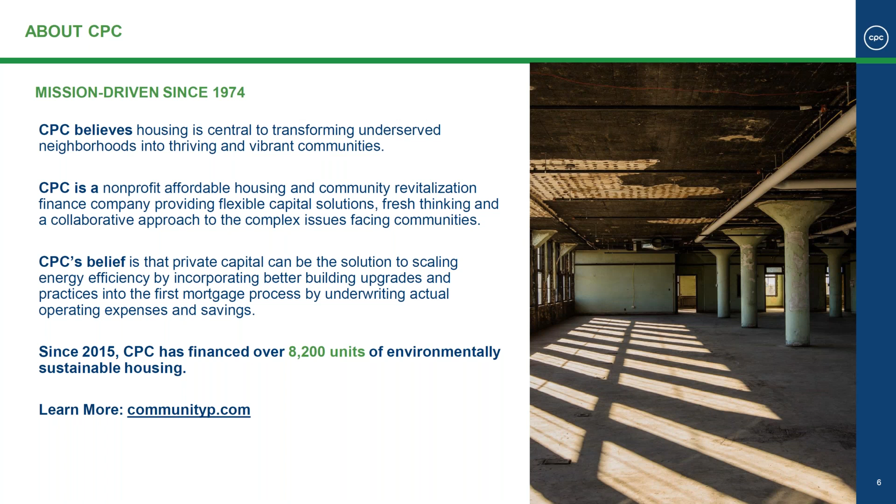Before we jump into the presentation, I very briefly want to introduce CPC. CPC is a nonprofit tax-exempt 501c3 affordable housing and community revitalization finance company. CPC was formed in 1974 as a direct response to the issues of property abandonment and blight that New York City was facing at the time. Our mission was and continues to be to bring low-cost capital and fresh thinking to the complex issues facing communities. CPC provides a full suite of products to finance multifamily housing and to create and preserve affordable housing.

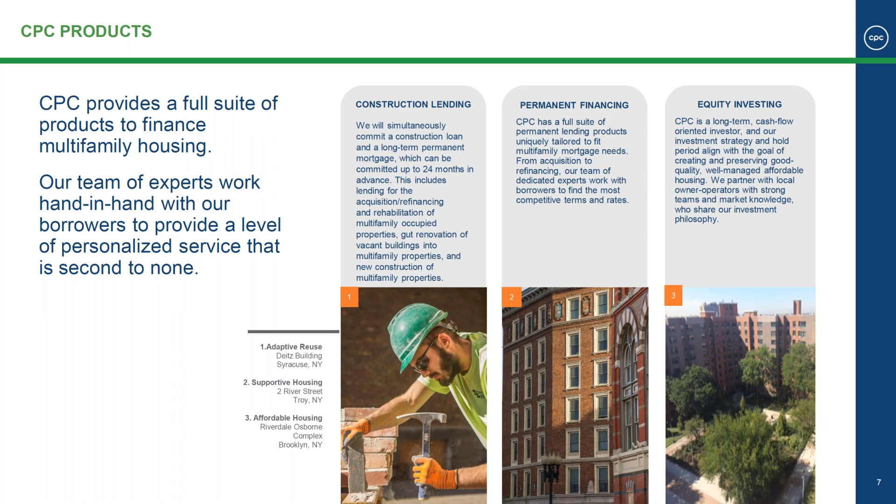Today, we are one of the largest community development financial institutions in the country solely dedicated to investing in multifamily housing. To date, we've invested over $11 billion of private and public capital in the Northeast region, which translates to approximately 195,000 units of quality housing in neighborhoods across New York State and beyond.

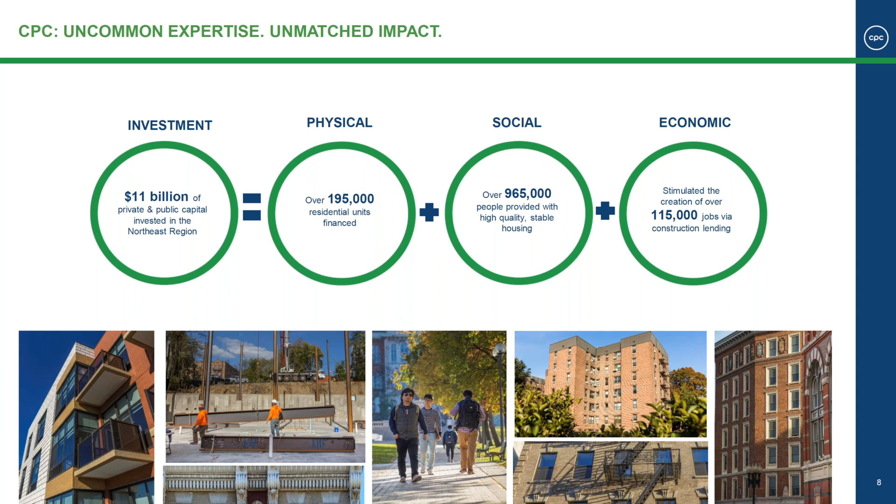Just very briefly about CPC's sustainability platform. The sustainability platform was created in 2003 to carry out CPC's energy efficiency and decarbonization goals. CPC is a carbon neutral company. We measure our carbon emissions on an annual basis.

We have a formalized reduction strategy internally, and then we offset remaining emissions on an annual basis. We've developed a number of tools and resources to educate and inform and engage the multifamily industry, including the CPC VeriFi tool, which is a software application that calculates potential utility savings and helps owners explore the financing options and cost savings for different multifamily building upgrades.

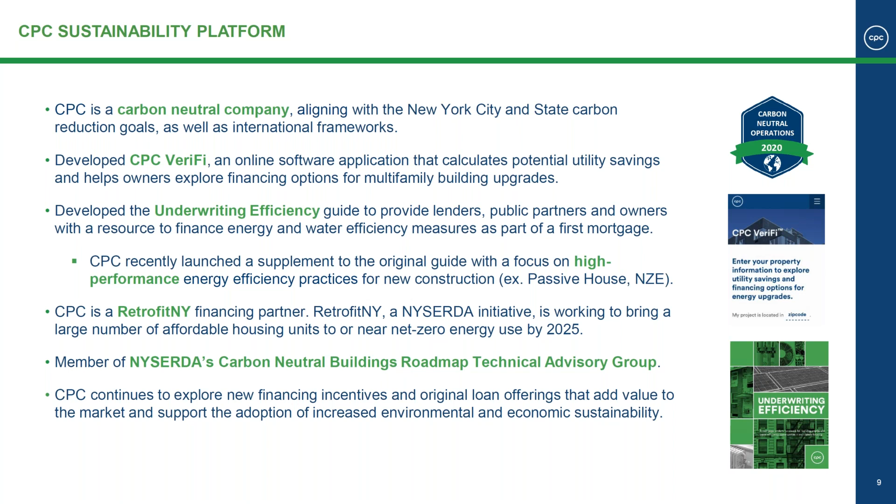We've developed the underwriting efficiency guide, which hopefully many of you know and have used. It was a guide to provide lenders and public partners and owners with a resource to finance energy and water efficiency measures as part of a first mortgage. We recently launched a new guide, which there's a slide on next, so I'll hold off for that. And we also partner with public and private organizations, mission-oriented organizations, and we continue to explore new financing incentives to promote and encourage energy efficiency and decarbonization.

Just lastly, very quickly, I'll make a quick plug. This is a new guide that CPC created. We recently launched this just last month on high performance new construction. The guide is designed for multiple stakeholders within the multifamily ecosystem. It tackles the basics of high performance design and how those design decisions can affect life cycle performance, value, risk, and overall asset health. So we really look at, what is a high performance building?

We explore some of the factors that are increasing demand for high performance buildings, such as climate legislation and new requirements from capital sources. And then we kind of do a deep dive into the building life cycle, looking at how high performance guides decision making and cost decisions, and how it affects operations and maintenance, and appraisal and resale throughout that building life cycle. And finally, we look at some of the non-energy benefits that high performance creates.

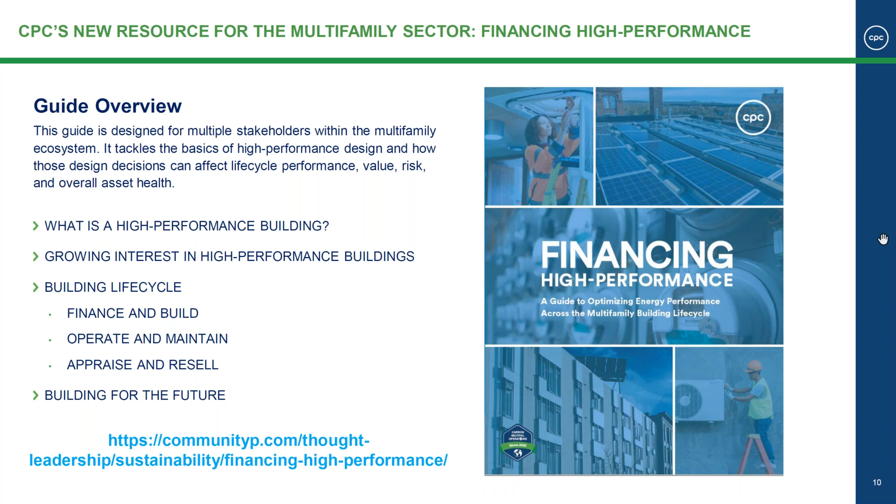He will walk us through this presentation. Okay, thanks. So I want to talk about the Advanced Energy Design Guide for multifamily buildings in this session. Let's see if the slide will advance. Click on into the window, Paul. Yep. Oh. Did you see it advance on your end? No. I'll go ahead and take over. Try it again. It works. How about that? Okay, all right, let's do that.

So first, I want to talk about the Advanced Energy Design Guides, but before I start, they are really based on a concept of a zero energy building. And we're using this definition as a basis of that. It's really about the balance between the consumption of the building and getting the consumption down to the point where renewable energy can supply the remaining needs.

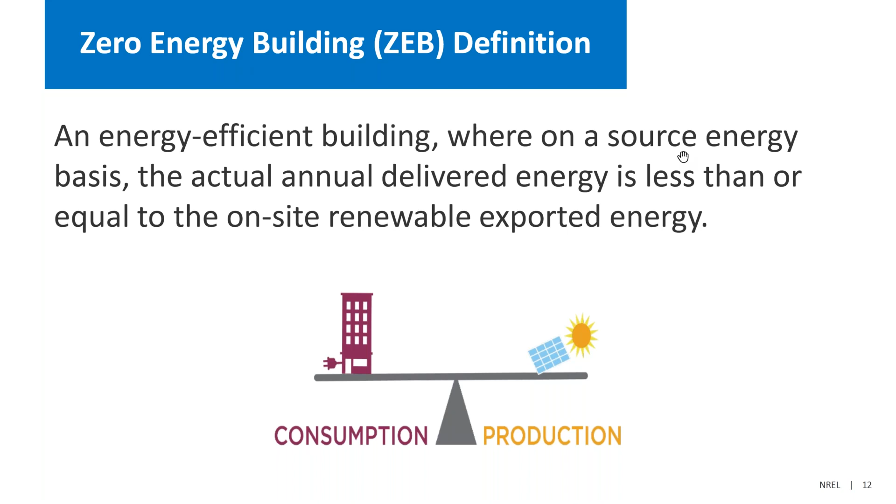A lot of it has to do with where we draw that boundary. These buildings are connected to the grid, so I want to make sure everybody gets that - it is a transaction between the grid supplying energy as well as producing energy on site. If there's an excess, it can be exported, and not only to the grid, but it could be exported to other uses such as electric vehicles.

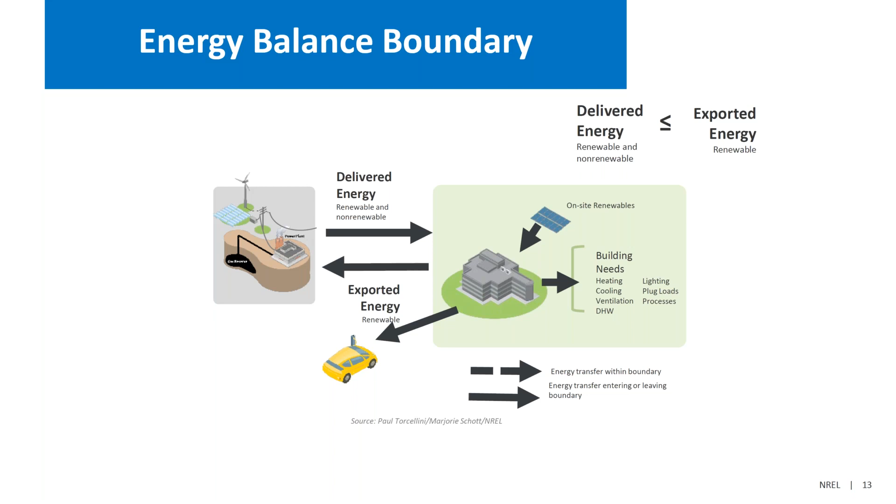When we start thinking about this, we really think about how much energy is available at the site. For most people, that renewable energy is coming directly from solar and then through photovoltaics. While there are other renewable resources available, a lot of what we are focused on is the photovoltaics from the production side.

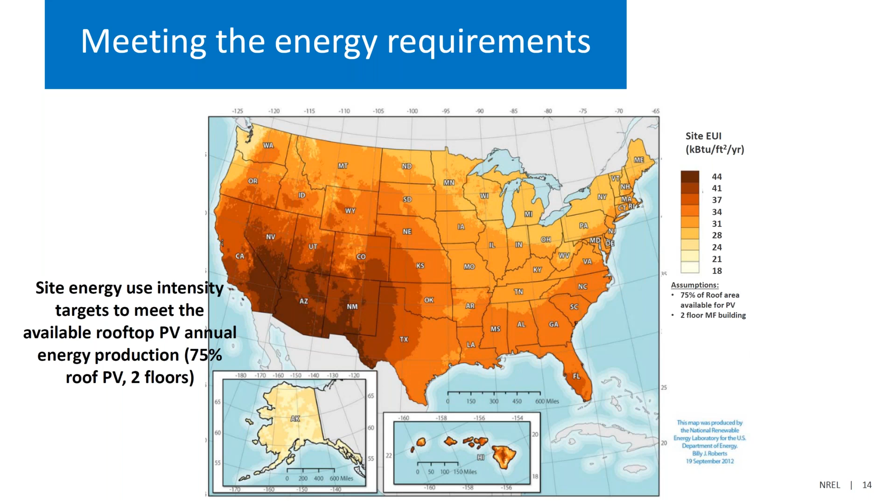Southern Arizona could use 44,000 BTUs per square foot as an EUI target, whereas moving up into New England, it could be half that amount. What we strive to do is get that EUI to match what the consumption is of the different buildings.

Moving into the Advanced Energy Design Guides, which implement that thinking, these guides have been around for many years. They're published by ASHRAE, but put together as a cooperative effort between ASHRAE, AIA, U.S. Green Building Council, and the Illuminating Engineering Society. Funding comes from the Department of Energy, and the national labs have provided technical support and a lot of the modeling to show the feasibility and impact of different energy efficiency solutions.

They started off first as 30% guides, very specific to a number of different uses. Think of them as a cookbook or instruction book on how to achieve this kind of goal. About 10 years ago, a little more than that, we moved to 50% guidance and produced guides in the areas listed there. More recently, we've switched to zero energy guides, and already published are K-12 schools, as well as small to medium offices.

In this presentation, I want to focus a little bit on the multifamily guide, which is expected late this year, probably early next year at this point.

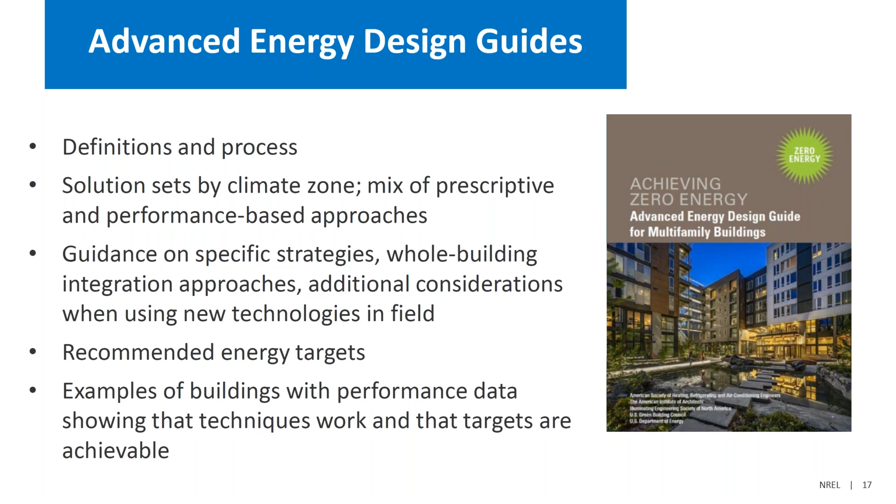And then we have examples of buildings, and these examples are critically important, to show that they have performance data and that these buildings really work. But also real buildings are built with real dollars, and to show people that the business case can be put together in a way that makes sense and works for investors, tenants, or owners, whoever is actually in charge of that business case piece of it.

Primarily, the audience is the architects and engineering community, those making the design decisions. We find another use case in building owners, where they can gain confidence and look at their risk in trying to deliver a building like this, say these EUIs are achievable, others are doing it, and use it as a mechanism to hand off to design teams to get this level of performance.

Very quickly, the guide is broken down into an introduction, rationale for why these things are important, the keys to success, how do you put teams together, how do you make decisions.

There is a chapter on building simulation and modeling, creating a building such that you know how it's going to perform before it actually has to really perform.

And then the bulk of the book is our how-to strategies. There are roughly 200 how-to strategies in each of these guides, broken down by different disciplines.

As an example of some of those different disciplines: building and site planning, envelope, daylighting, electric lighting. We do hit plug load management, which is really important for multifamily, something design teams don't normally think about, but how do you strategize to reduce plug loads when you might not have total control over that because you don't know what tenants are going to bring in, but there are strategies to work with that.

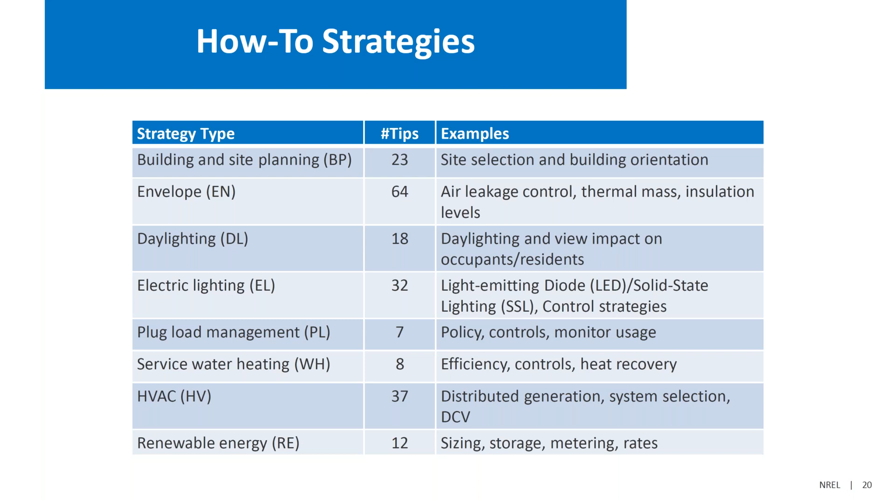We did provide modeling support for these and modeled actual floor plates of buildings that would mimic multifamily, and it's been made into a bit of a generic model.

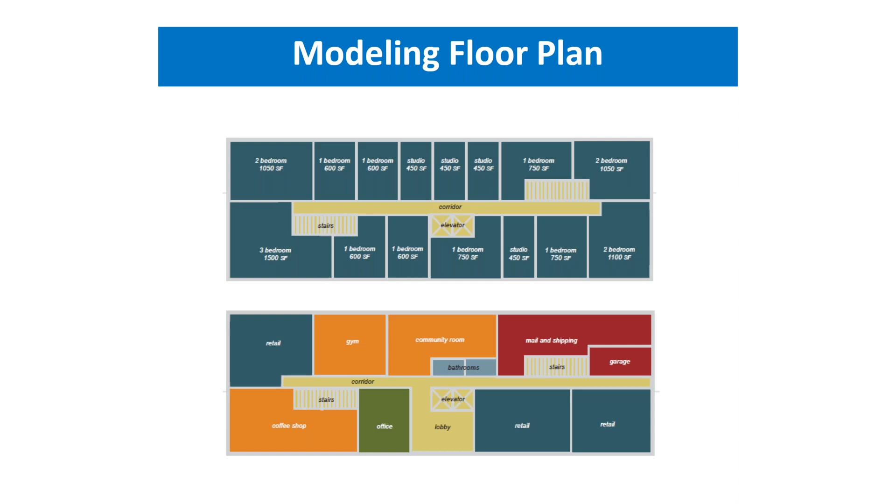The first floor in these buildings is commercial space, and it could be a light plug load retail operation—this one had a little coffee shop in it. It could be community space and office space, representing what goes on in the first floor of a lot of these buildings, with tenant spaces, residential tenants, above.

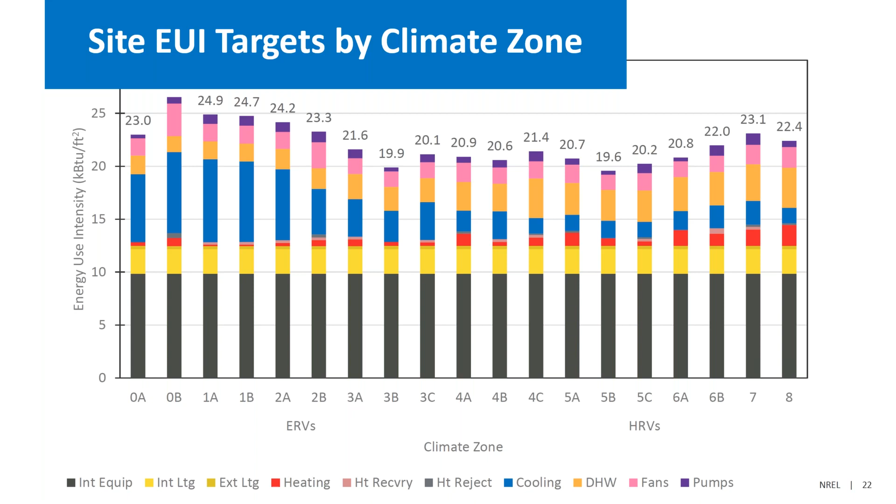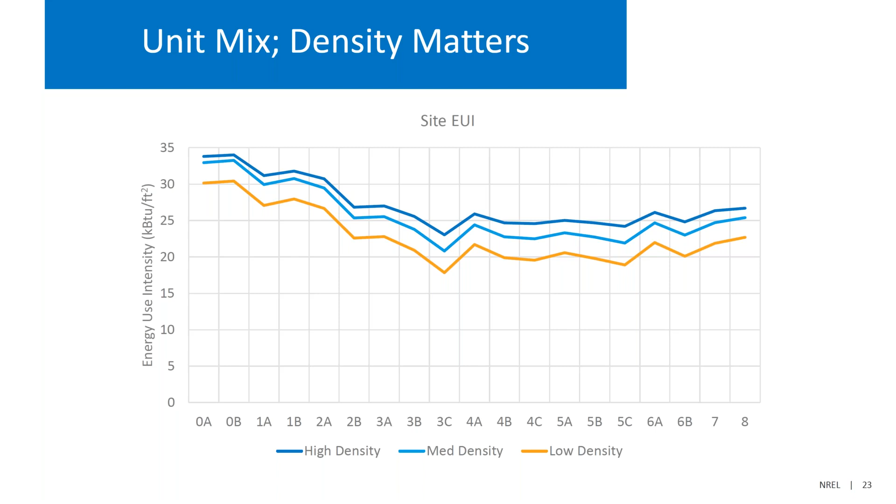The density is interesting—it matters in terms of how many 1-bedroom, 2-bedroom, and 3-bedroom apartments you have, because in a 1-bedroom scenario you're going to end up with a lot more refrigeration. So we did look at how those different densities change in the buildings across different climate zones.

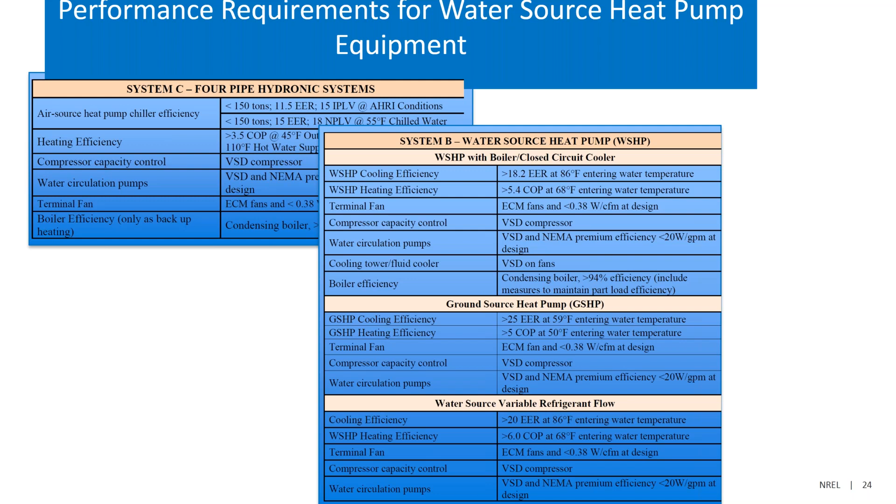So there's really three aspects of this all rolled together.

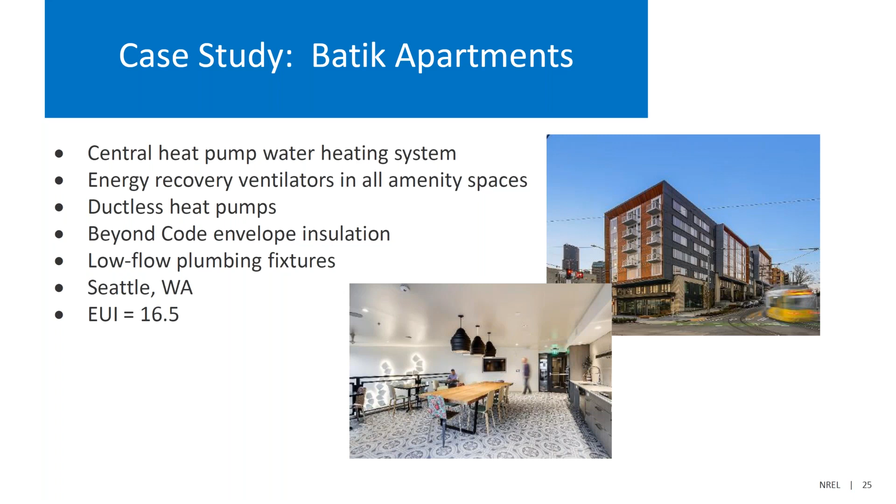They are free and available through that website, from ASHRAE. We are expecting this to be out early next year. I also want to mention that AIA, USGBC, and ASHRAE now have online training on the Advanced Energy Design Guides.

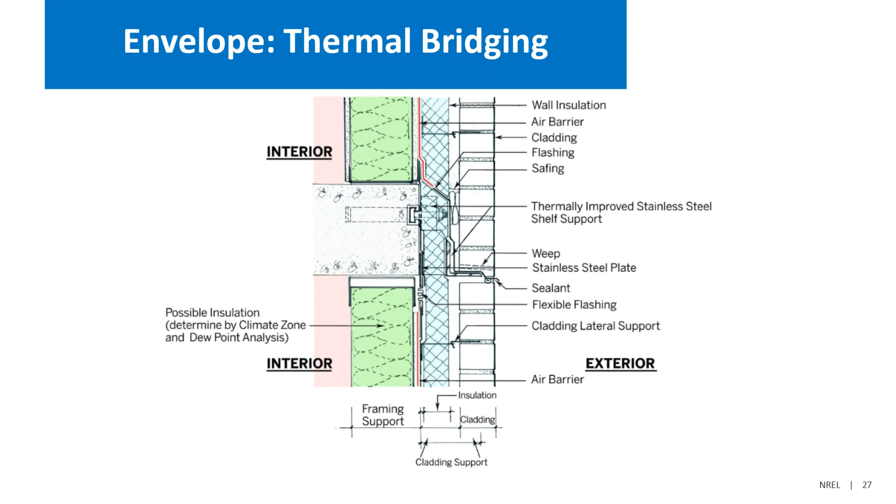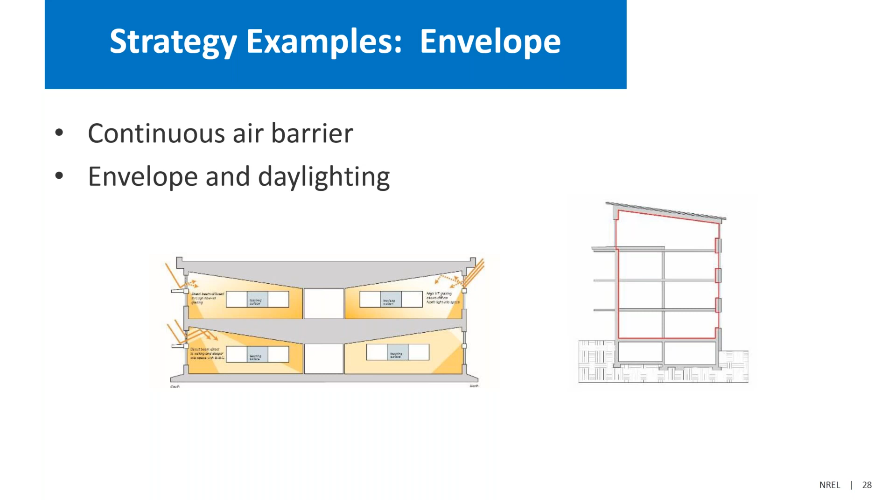And again, same on the envelope, looking at continuous air barrier, starting to talk about pressure testing buildings to make sure that the envelope is of very high quality.

I will wrap up there. I would encourage you, if you have questions, to enter them as Connie had talked about at the beginning, and we'll address those later.

Terrific, thank you Paul, it sounds like a wonderful guide. I'm eager to get my hands on it. You mentioned it will be published in early January - is that correct? That is currently the plan. We're always working with the schedules - this year, as many know, have been challenged on many fronts. We are going to get it out as soon as we can. It is done and drafted and in the publishing process now.

Fantastic, well it sounds like you really got something in there for everybody - practitioners, designers, architects, engineers. But also, from where I sit as a lender, the examples with performance data showing that these techniques really work is so key. As a lender, we're interested in comps, and the more comps we can point to, the more aggressive we can be in our underwriting. So that's terrific. Next, we will hear from Maya Gantley, project manager at the Association for Energy Affordability, and she'll take us through a case study from California. Maya, the mic is yours.

Hi everyone, my name is Maya Gantley, and I'm with the Association for Energy Affordability, AEA, a nonprofit that implements and provides technical assistance to an array of multifamily affordable housing energy efficiency programs in New York and California. Today I'll be talking about a California case study that went through one of these energy efficiency programs and completed a deep retrofit, approaching net zero.

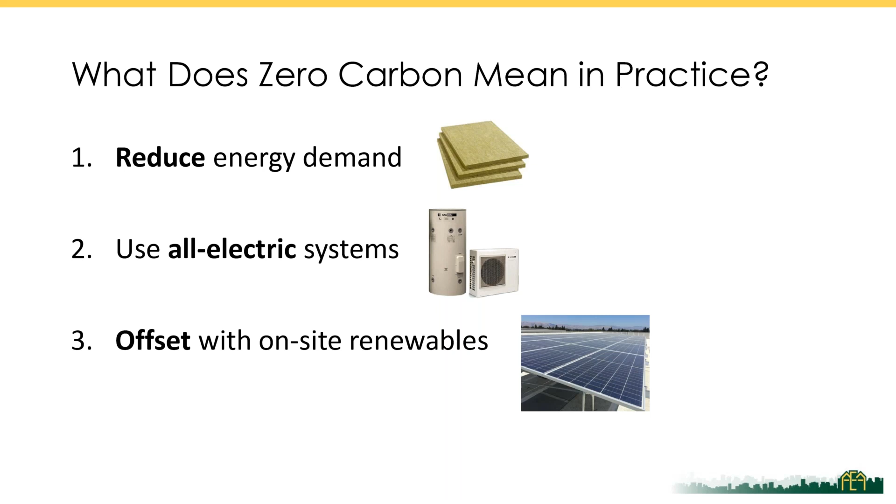For every project, we try to utilize three principles. The first is reducing your overall energy demand, focusing on air sealing and insulation and really improving the overall building envelope. Secondly, we look at using all electric systems - really talking about heat pump based systems, so heat pump water heaters and heat pump HVAC rather than electric resistance, lower efficiency electric systems. Third, we offset with on-site renewables, ideally talking about PV systems.

The three main design challenges we face on nearly every project are electrical capacity, cost, and knowledge and comfort. For electrical capacity, this really can be a challenge, and it sometimes does stop a project from moving forward with electrification. But often it is possible, and it's key to investigate your load assumptions and even complete load monitoring to dial in your HVAC sizing. Especially for retrofits, offsetting even one or two key systems is still a great achievement, even if you can't do all of them. For cost and knowledge, these really go hand in hand, especially as we engage with owners and contractors, getting them involved and educated about these technologies. We found that upfront costs can come down, and concerns around maintenance are often alleviated.

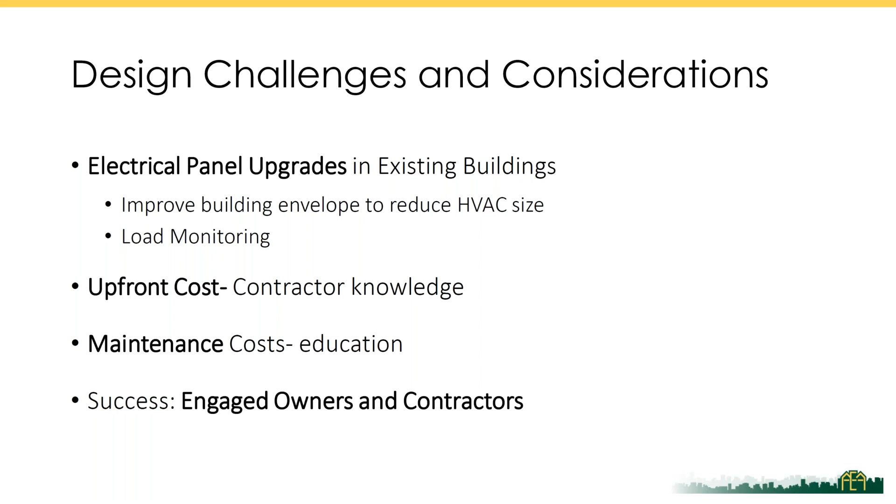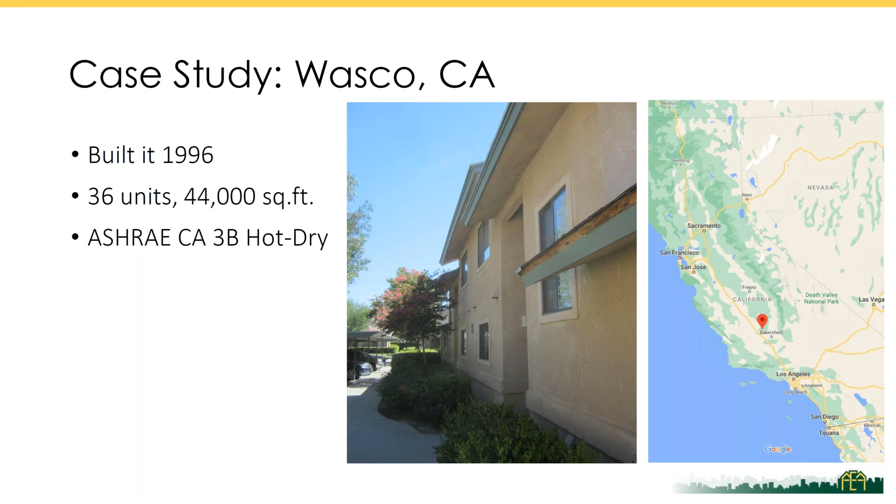So diving into our case study, today we're talking about a project in Wasco, California, located in the Central Valley, built in 1996, 36 units, and 44,000 square feet. This was a 9% TCAC project as well, so there was a larger scope beyond the energy efficiency that we were looking at.

So the first chunk of the scope is some of the low-hanging fruit, including LEDs, low flows, and high efficiency refrigerators. Then we focused on improving the envelope through attic air sealing and insulation, as well as double pane windows, and improving the ductwork. Then we fuel switched from in-unit gas water heaters to in-unit heat pump water heaters, and in-unit gas furnaces and ACs to high-efficiency inverter-driven heat pumps. And lastly, we offset with on-site renewables, a 110 kW solar array, 93% of which was allocated to resident bills.

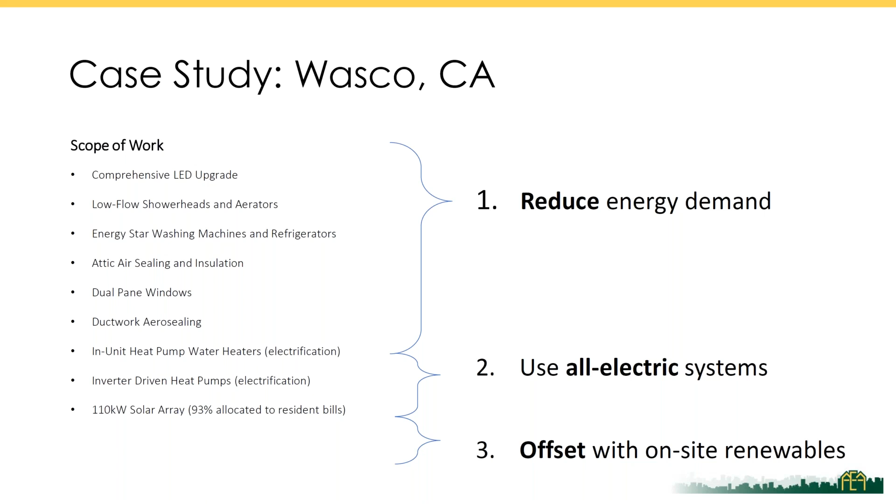And then just really quickly about the project cost. The total cost of the retrofit of this scope was $1 million. The various leverage funds we were able to utilize were around $540,000, so the out-of-pocket cost for the owner was $460,000. This is probably a little higher cost than standard, partly because TCAC costs are often inclusive of other trades. This same owner has done very similar scope projects at much lower install costs, maybe resulting in 100 or 150K out of pocket.

So the first main envelope improvement was the pretty standard attic insulation along with air sealing below. We also have Aeroseal duct sealing. This is maybe a more advanced technology than standard, but essentially you pressurize your ductwork, spray this foam that covers every small hole, and can bring duct leakage from say 25% down to 5%. It's super effective, but it does come at a cost premium. A cheaper alternative could be done with hand sealing, boots to drywall, even cleaning and lining your return plenum. There's a lot you can do for a much cheaper cost that still has a great impact.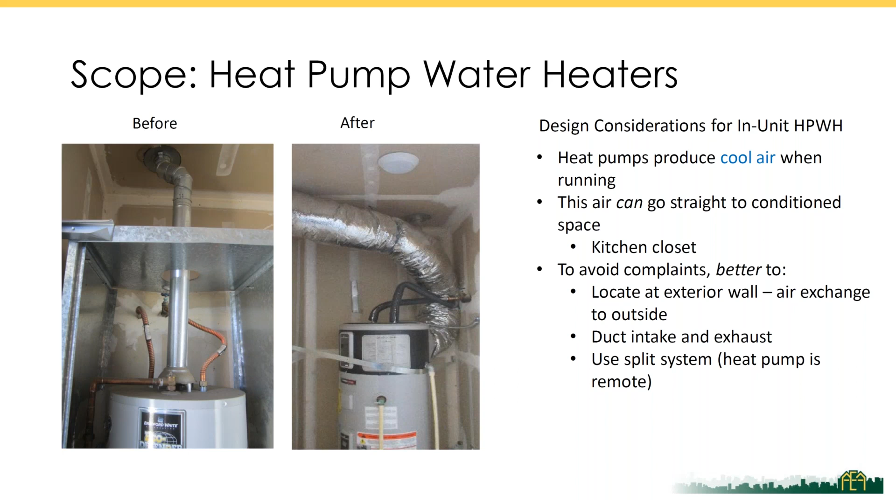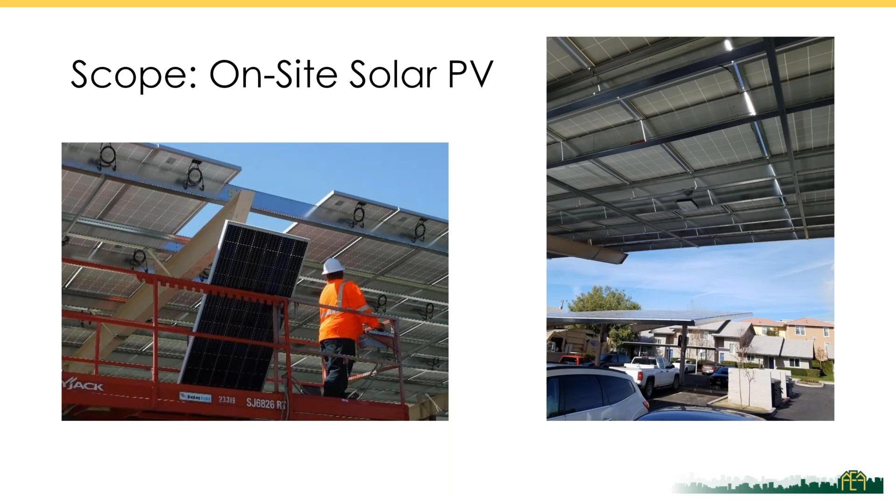And then lastly, we had solar PV on this project, so we were able to utilize virtual net energy metering, which was really key. For folks outside of California, it essentially allows us to use a commercial size system, but allocates a percentage of the production to each unit. Especially for affordable multifamily properties with all in-unit systems, this was really key to making the project a success.

All right, so diving into the data, which I know most folks are really interested about. Right here we're looking at total residential energy use in kBTU monthly pre and post construction. We have natural gas in orange, electricity in blue, and our PV solar in yellow, which is not factored into the electricity post occupancy. You'll notice we still have a small amount of gas remaining, because we were not able to offset the cooking at the property. This was ultimately limited by the electrical capacity, and we weren't able to do any panel upgrades, so that was a limitation.

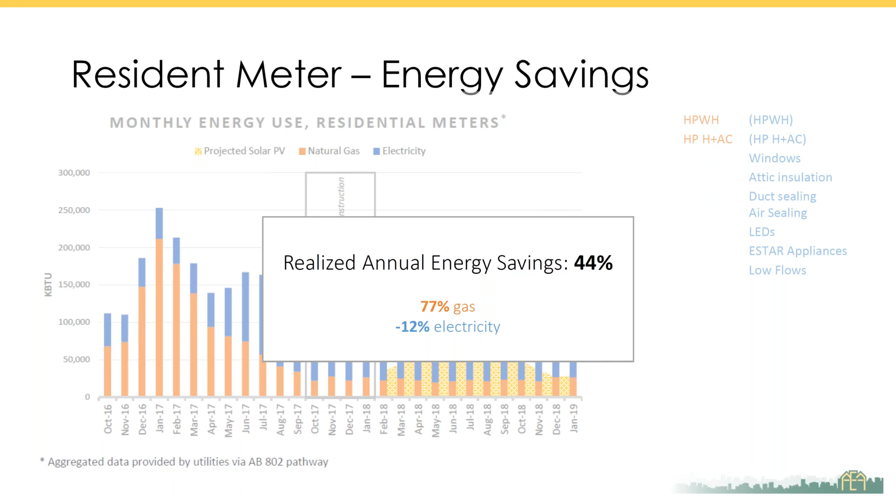Overall, we saw really high energy savings of 44%, and we're not even looking at a passive house retrofit. These are really basic energy efficiency scope measures, but we're seeing really high savings. The realized annual energy savings was 44%, with 77% gas savings, and a slight increase in electricity usage.

So most folks ask, okay, great, you saved a bunch of energy, but what happened to the residential meters and their utility bills? So we're looking at total residential meter energy cost per month before and after, and again, PV is separate from this.

What we saw is ultimately from energy efficiency only, we still saw cost savings of 18%, or just over $8,000 per year. Including solar, we saw 68%, equivalent to $30,400 per year. This translates to about $830 per year per resident, which is really impactful for these low-income communities. This was our projected number, and upon further analysis, we ended up seeing 70% cost savings overall.

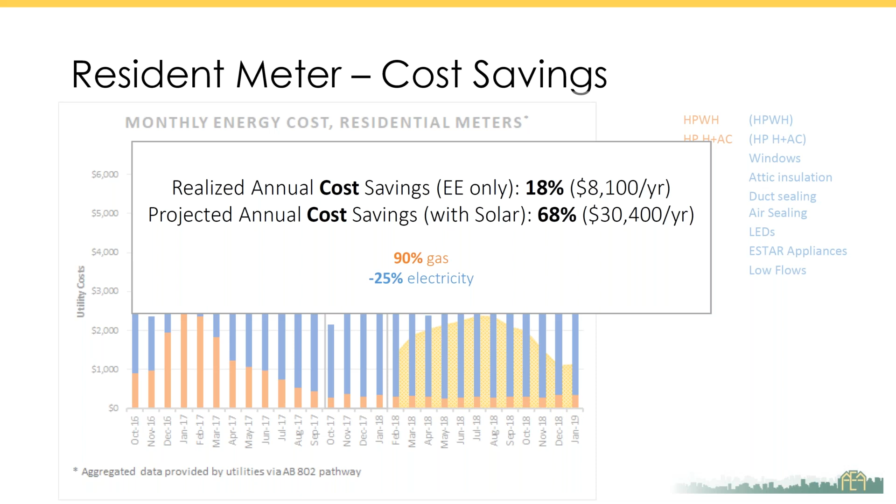So some lessons learned and takeaways. As I mentioned, we were not able to offset our cooking, our gas end use, which is our final end use at the property. I think this came down to when we did this project; we were evaluating the scope in 2017. Since then, we've learned a lot more about load monitoring and sizing the HVAC system. So perhaps if we were doing the project today, we could have done additional unit heating and cooling load analysis, reduced the HVAC size, and perhaps even been able to offset the cooking. And then I'd say that for retrofits,

everything else can go wrong, but if you don't have engaged owners and contractors, that's really where we see the most challenges. So I think that is ultimately our key to success, really owners and contractors who are willing to take the time to find the right solutions for the specific property.

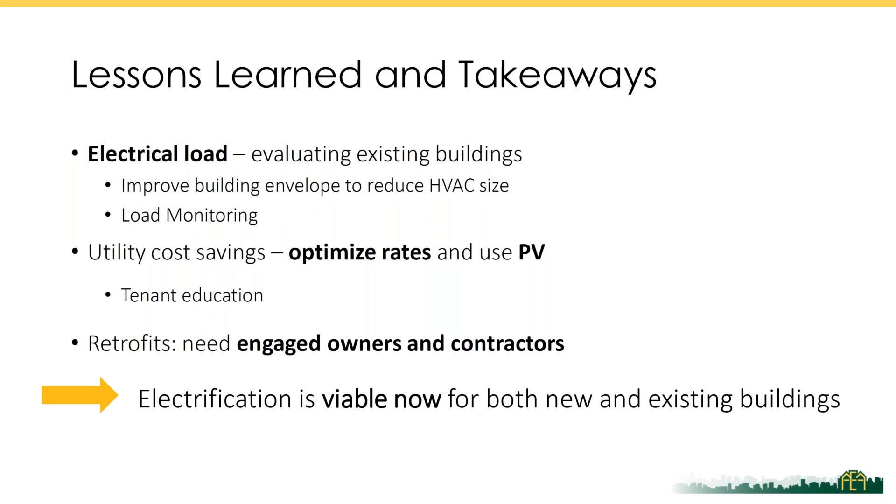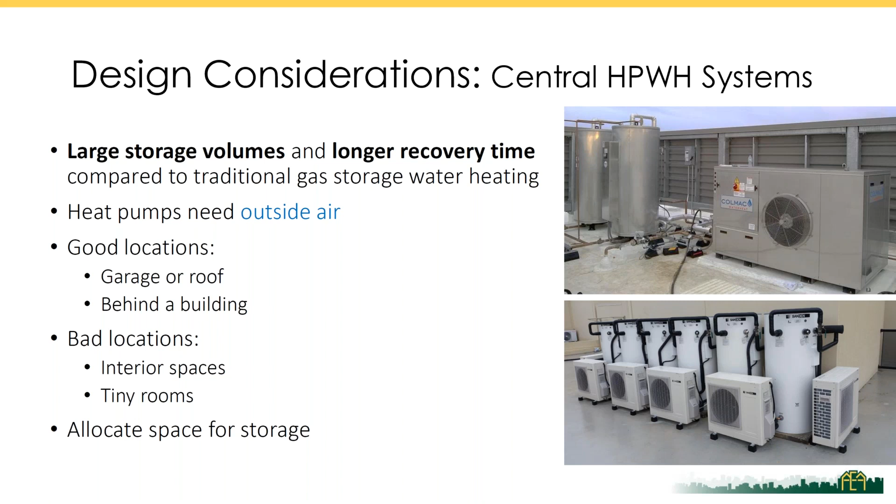The main takeaway I want to leave you all with is that electrification is viable now for both new and existing buildings, and there are so many resources out there to make a project successful, especially one like Paul just reviewed. Lastly, I wanted to mention that I know we only talked about in-unit systems today, but we are seeing a lot of success with central electrification and central heat pump water heating systems. There are definitely some key design considerations that are very important, so feel free to drop those questions in the Q&A, and maybe we can get to those later. Thanks so much.

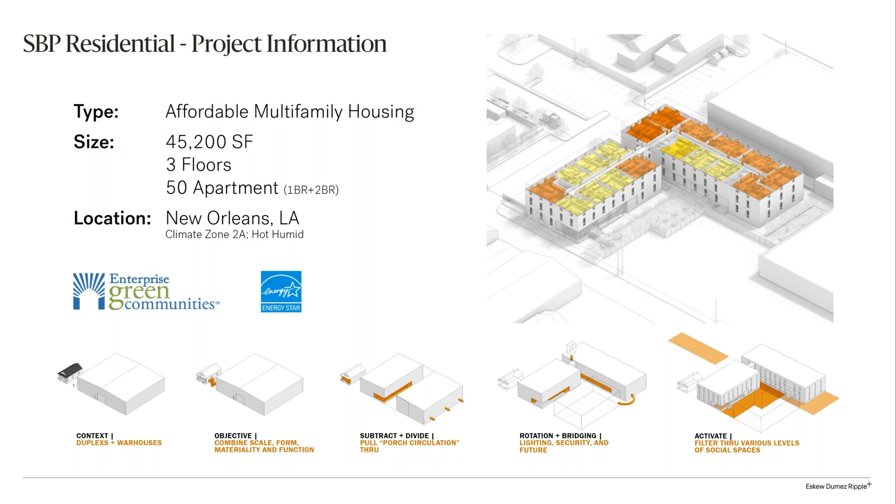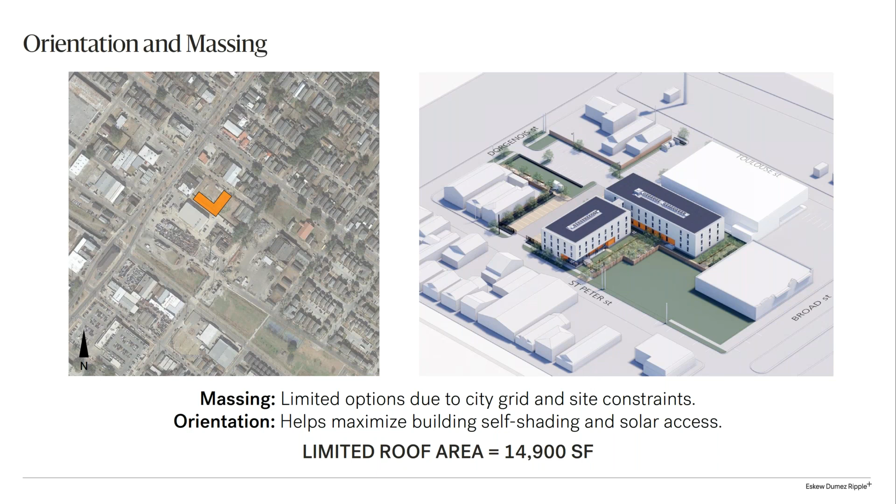But for orientation, we had some options, and we opted to have the building pointing southward, so to speak, which provides most shading for the courtyard and also maximizes the area for solar access for the solar panels. Overall, the roof area is about 15,000 square feet.

So when we started this, there were two questions, and we had two parallel exercises—there's a supply and demand issue. The first question is, what is the lowest EUI possible for a residential building in this climate zone?

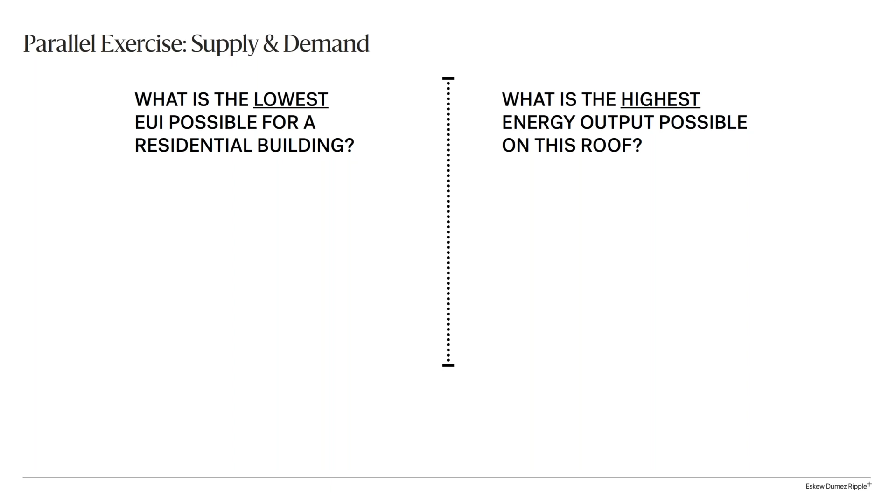The second question is, with the form and massing that we have, what's the highest energy output we can get on this roof, which is 15,000 square feet. Based on some research, an EUI of 15 kBTU per square foot per year was possible, though when we did our modeling, we realized it's closer to 17 - 15 was more for single family residential, which is a bit larger, but with high density multifamily it was close to 17. For reference, the Energy Star EUI was about 32, and the regional average based on the target finder was about 48, so we're cutting that by about two thirds.

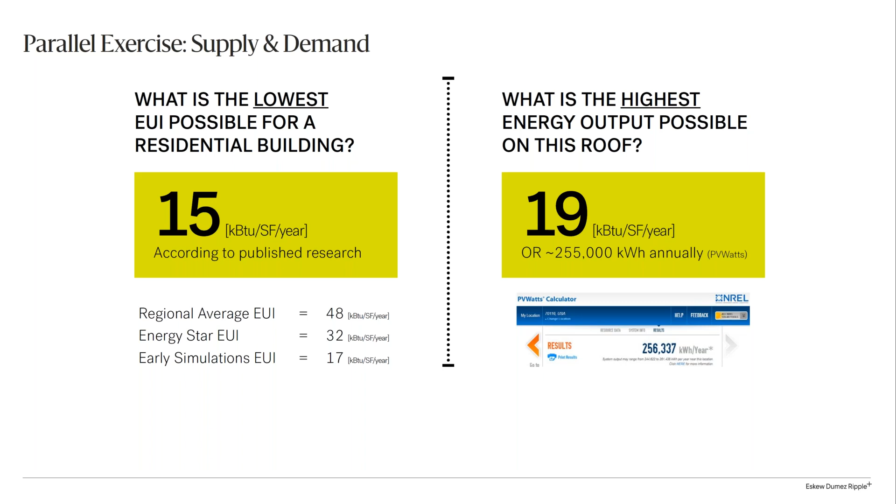On the other hand, what's the highest energy output possible on this roof? We figured out it's about 19, using premium panels and reasonably good coverage of the building - about 75 to 80%. New Orleans didn't have a lot of rules when it comes to clearance, so we ended up having solar panels up to about 18 inches from the edge of the roof, and there are no parapets, for the architects out there. That's about 255,000 kilowatt hours annually.

So the goal here is to design the cheapest building we can that is below that 19 EUI, and we know that we can get a building as low as 17. So we have this 2 kBTU per square foot per year buffer that we can work in.

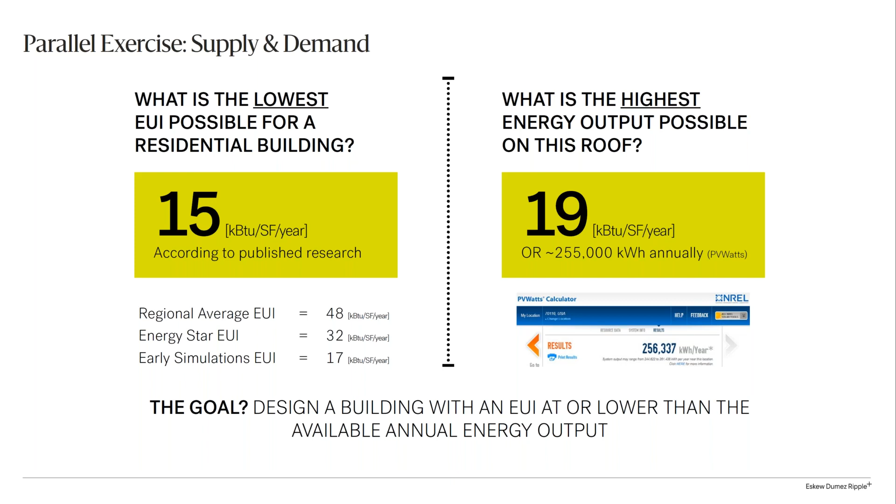Are you having some trouble with advancing? Yeah, I think Connie, if you can take it from here. Sure.

All right, so we used eQuest, the famous simulation software, to model this. We followed the multifamily high-rise protocol, and it was straightforward.

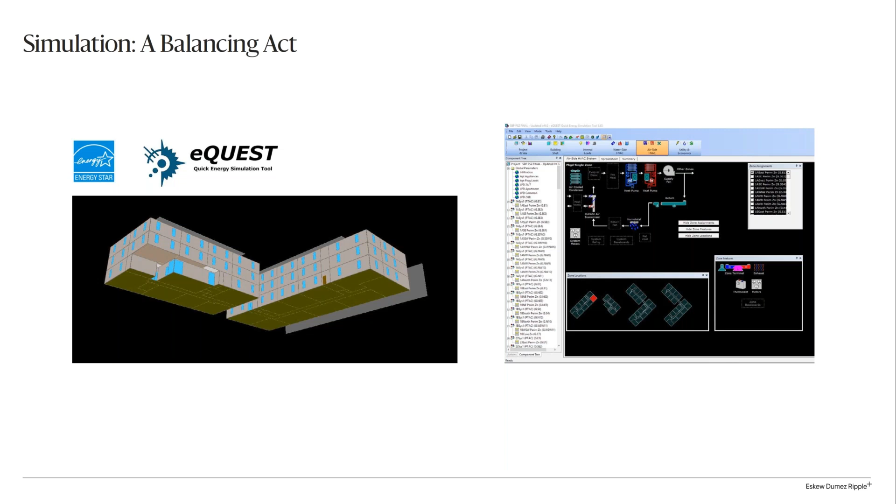Our instinct was to start out by modeling advanced HVAC systems. What you see on the far left here was the baseline - I think it's a SEER 13 - with an EUI of about 25. Then we modeled a few other options: we increased the heat pump or air conditioner rating to 15 and then 17. Those were available in the market.

We also had a VRF system with local exhaust, and then VRF with DOAS and ERVs on them. We didn't model geothermal because, based on market research, we thought it wasn't possible with the soil type in New Orleans. But as you can see, the savings are pretty modest, and the premium for each of these systems increases quite significantly.

Looking from the baseline to the VRF and DOAS with ERV, we're looking at about a 300,000 plus premium, and the savings are like 2 units of EUI. We know we need to hit at least 19, so that wasn't the answer.

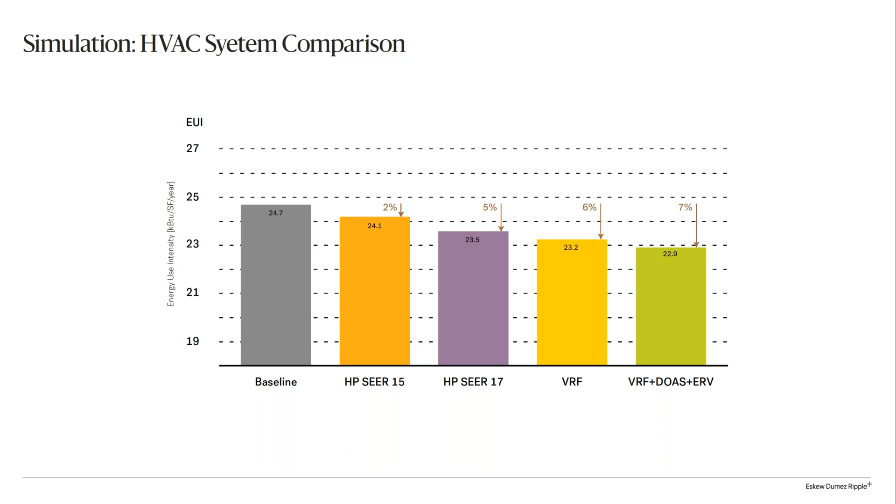That wasn't the answer, looking at the HVAC system. So we looked at the next slide - we looked at all the systems of the building, and realized that all of them actually matter.

When you look at this chart, you realize that envelope, at first, we didn't think it was a big deal. But there was one trick we utilized that made the savings exceed 30% from the baseline, or from the energy code baseline. Lighting is not as big a deal in this building type, in our experience, but again, HVAC, domestic hot water, and appliances all contribute to the absolute EUI that we got. As you see, we've managed to hit an EUI of 18 kBTU per square foot per year.

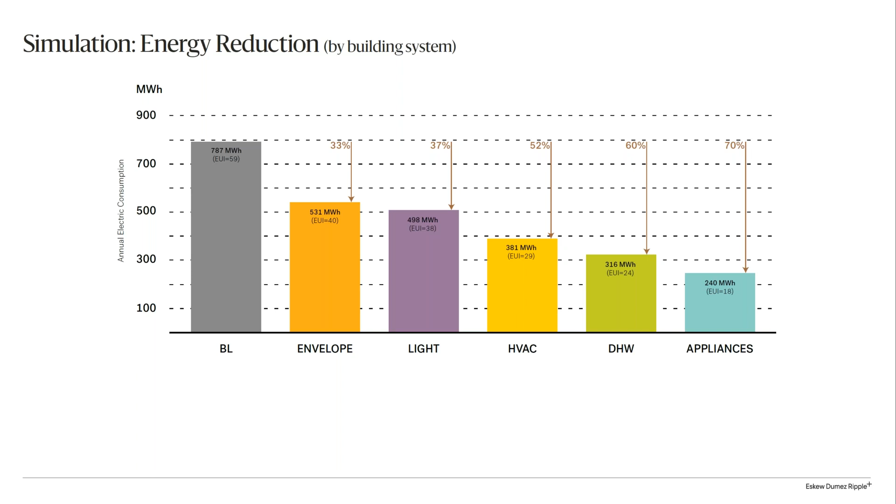This is broken down a little further by measure. There's a big drop in the envelope measure, where we modeled the infiltration rate from a very loose 5 air changes per hour down to about 0.5 air changes per hour. That comes from the building code, and 0.4 CFM per square foot of envelope area comes from a more advanced energy code - I think the 2013 version.

Background: ASHRAE 90.1 2007 is the energy standard of the state of Louisiana - I forgot to mention that. So our baseline is pretty low, and it doesn't help us a lot when we present these cases to clients to have a model code or model standard that low.

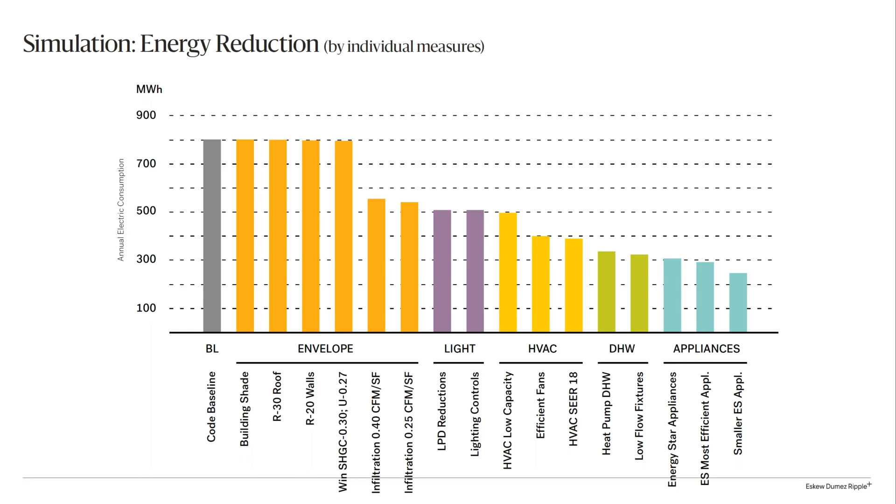This shows the makeup of appliances in a multifamily building. At a glance, the refrigerator is about 35%, the clothes dryer is about 35%, and the washers and dishwashers are about 11% and 19%. I don't include the microwave or oven because they're electric resistant, so there's not a lot of leeway there. This chart tells you to focus on clothes dryers and refrigerators when you spec these things, and choose the most efficient ones, because they have the biggest contribution to your appliance profile.

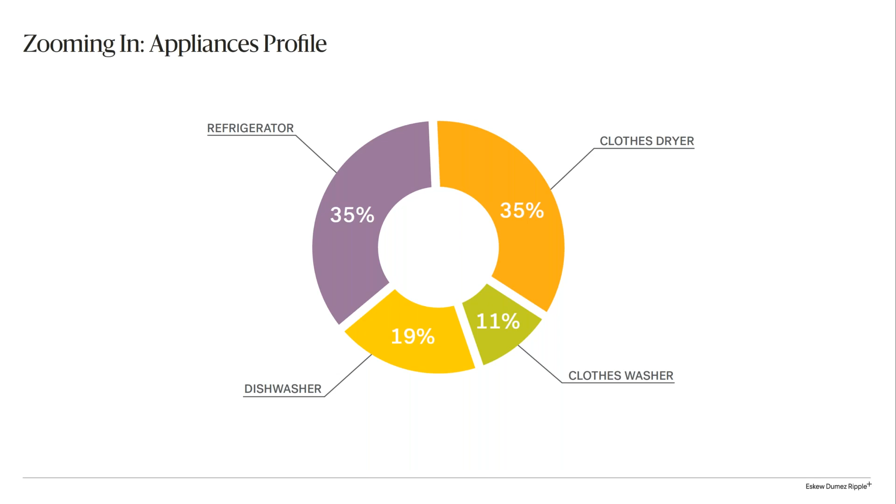This slide is a continuation of the one before, looking at the baseline for each appliance type, the Energy Star entry level, and what we spec'd in this building. The ones we spec'd were from the Energy Star list. You can see, for example, the clothes dryers are almost 75% more efficient than the baseline, and that's a big deal. That actually got us to where we needed to be at an EUI of 18.

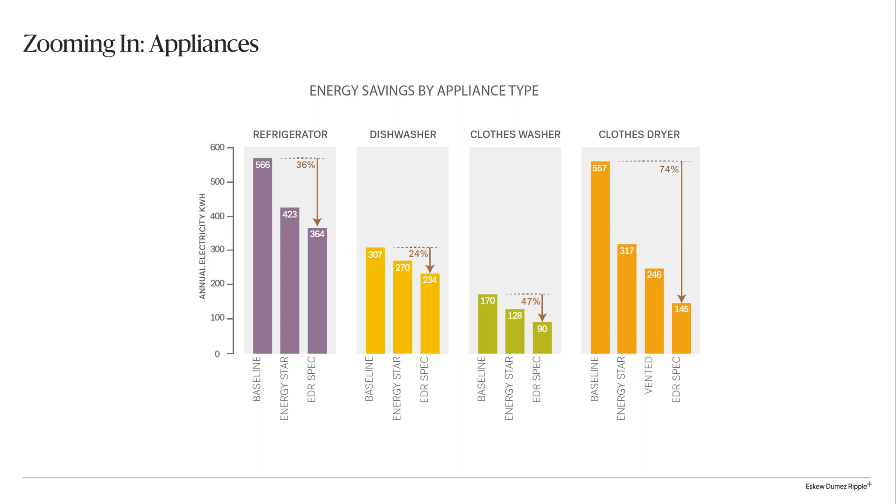This chart is pretty important for those concerned about cost of measures and return on investment. It shows savings in kilowatt hours for each $10,000 of initial cost. Notice that premium appliances and heat pump water heaters give far more bang for your buck than installing a VRF with DOAS and ERV. So it's important to know where to put your money. We ended up installing a more inferior, like a SEER 17 heat pump system, and took the money allocated for HVAC and put it into heat pumps and appliances.

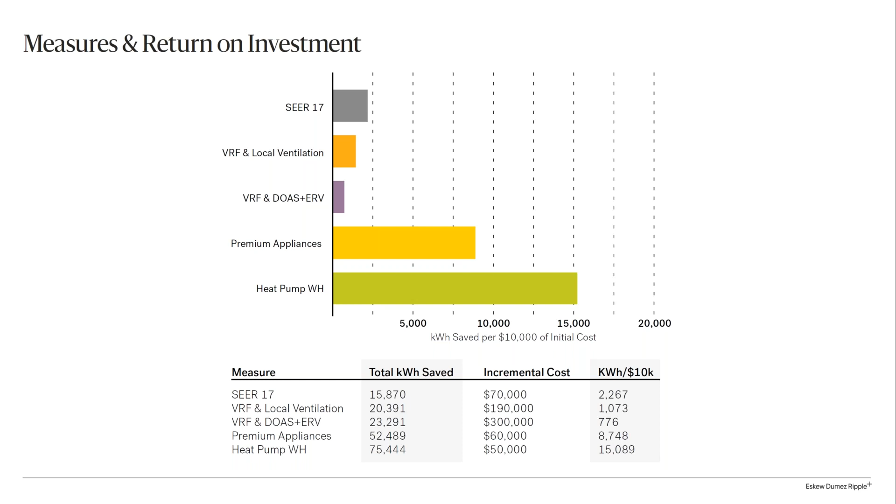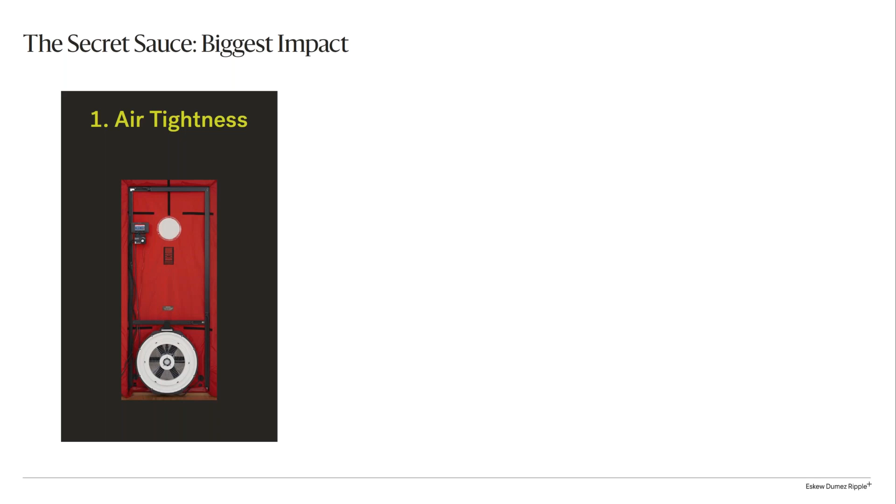So the secret sauce, so to speak, is first air tightness, which got us to our target by a large degree. Second was heat pump water heaters. Third is the ultra efficient appliances.

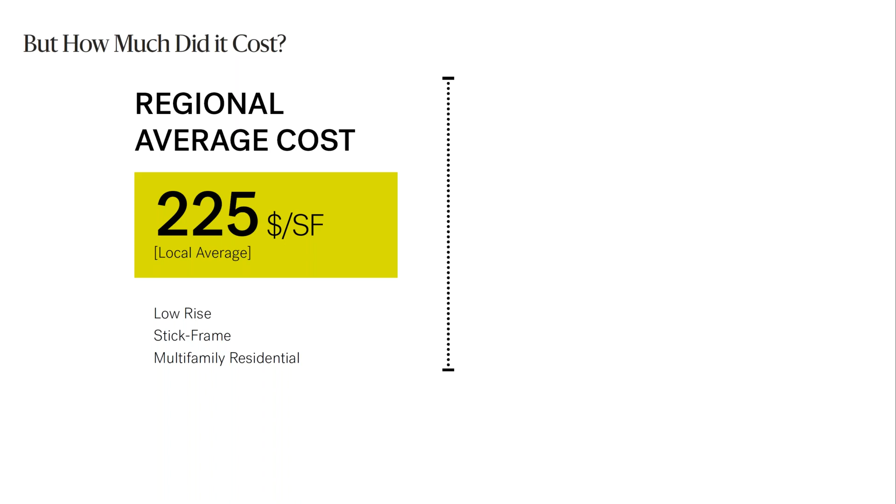The regional average cost for construction of this building type in New Orleans was about $225 per square foot. It's a low-rise stick frame multifamily residential building. We built this building, all in with a battery system and a solar system, for about $164 per square foot.

As you can see, the building had absolutely no finishes to trade off. It was bare bones, and we still managed to get it 27% below market average, and net zero and resilient, because it has a battery system that kicks in when the hurricane hits and the grid goes down.

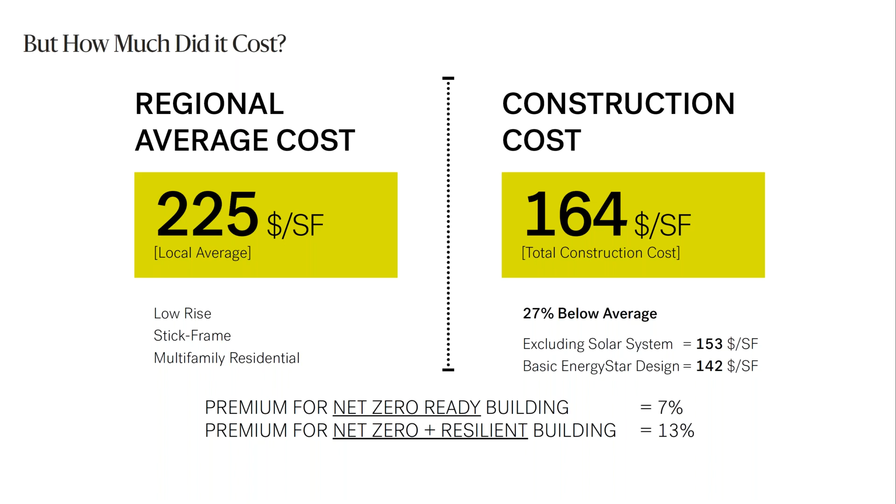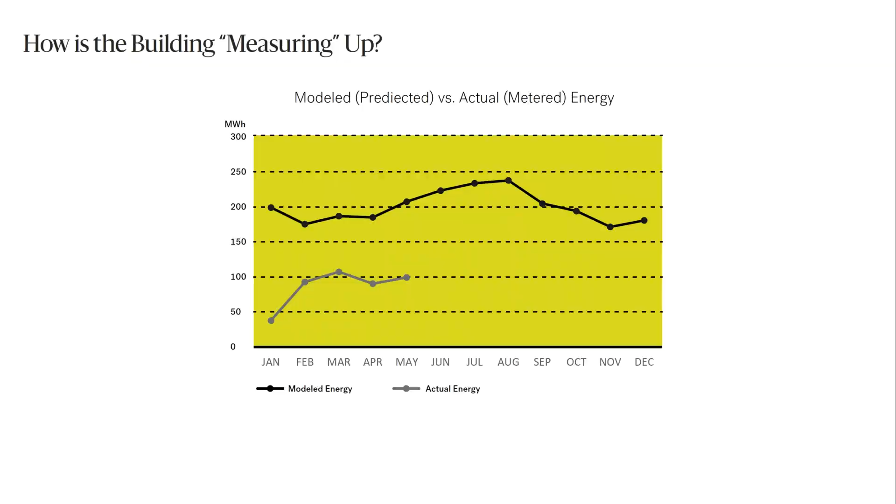And that's it, that's the last slide. Overall picture of the building. Thank you.

Thank you, Walid, that was terrific. I'd like to invite everyone to join me in a virtual round of applause for our panelists. That was terrific, thank you everyone very much.

We learned about the technical guidance and resources available from NREL, and Paul walked us through the new Advanced Energy Design Guide for achieving zero energy. Then Maya and Walid, thank you for taking us through the design and practice for both new construction and retrofit projects. It was really interesting to see that. I found it particularly remarkable to see the significant energy and cost savings.

While the audience is thinking of questions, I'll pose a few to the panelists. This one is specifically to Maya and Walid. In addition to the cost savings, I'm curious if tenants have reported back on their perspective of living in a high performance building, in terms of maintaining temperatures or reduced noise and odors from other apartments due to improved insulation and air sealing. Just curious if you've received feedback from tenants, and if so, what that is.